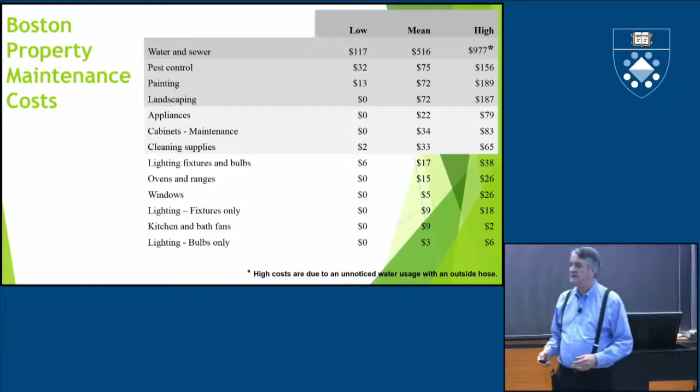Why do we have these wide variances in buildings? And why don't owners look at this? This disturbs me. Well, this isn't just bulbs and cabinets and appliances. In multifamily buildings, there's catastrophic waste. Oh, you're an owner, so you know this. There's catastrophic waste in groups of buildings. And this is a range of energy usage I've seen in buildings.

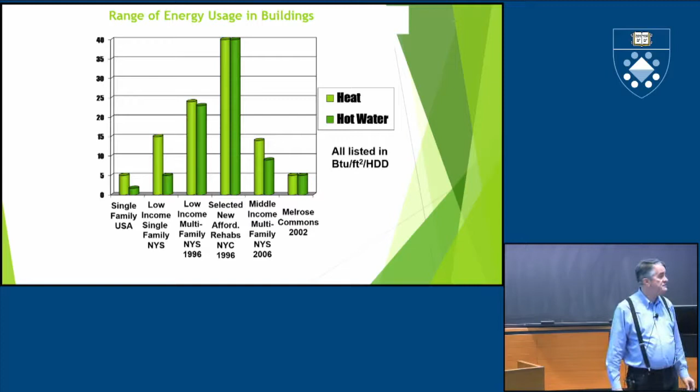But in 2002, I worked with a developer whose family has been in the business for 30 years. And we convinced him to change some things that he did in his building. And he built 70 units of affordable housing in the middle of the South Bronx called Melrose Commons. They performed at 5 BTUs per square foot per heating degree day. The builder said they cost him an average of $1.36 per square foot more.

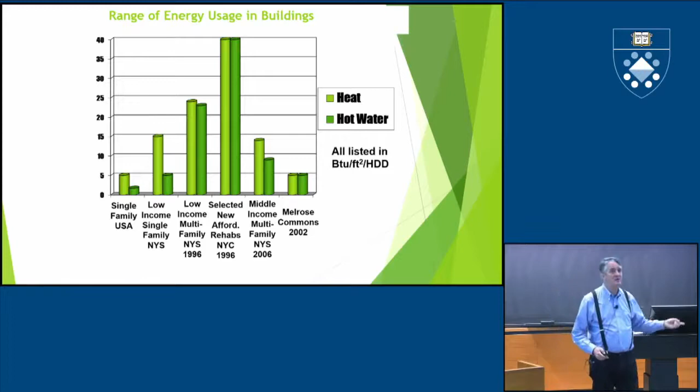This is stuff where logic is really simple. If you look at this chart as BTUs per square foot per heating degree day, and then go back to what the cost of gas was then, this is a difference of between under $1 and over $7 a square foot. This is very common in multifamily buildings, that owners of multifamily buildings don't see how much their buildings cost. As long as the buildings are profitable, they don't understand the cash flow from saving energy.

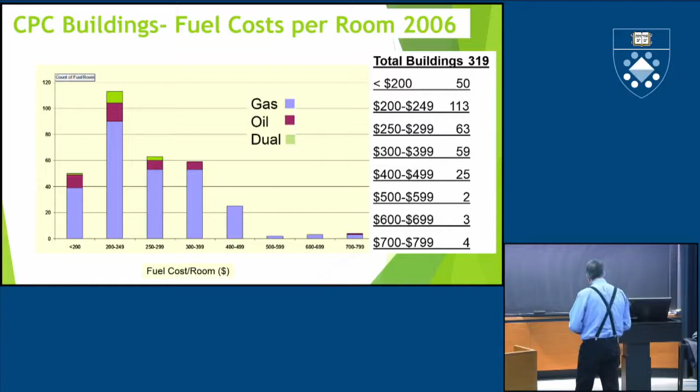I've met with people in the New York City Mayor's office doing a program for cash flow efficiency, energy efficiency for multifamily buildings, and I said, where's water? They said, oh, we're not doing water. I'm like, water's the biggest cost to building owners, not only in New York City, but in Boston, in Hartford. I actually don't know New Haven numbers that well.

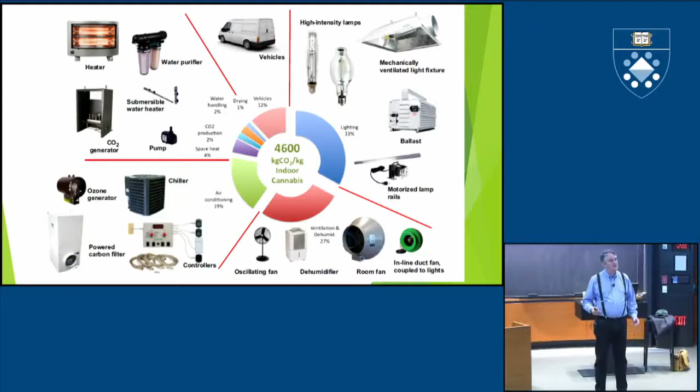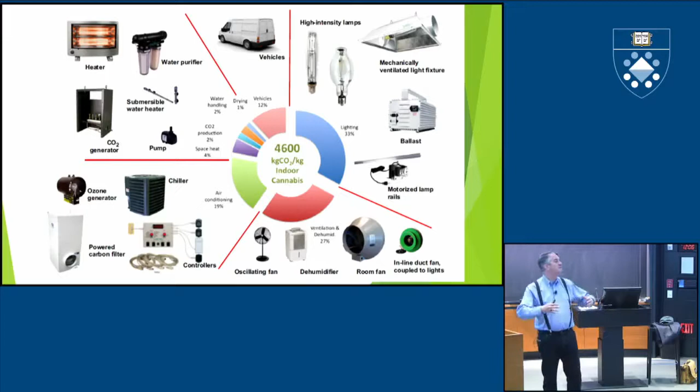Marijuana takes a lot of pumps and air and stuff. I actually talked to a marijuana manufacturer 3 months ago and suggested he change his lighting from fluorescent to LED. And this guy went into this detailed scientific stuff about why LED lights don't work well enough and they have to get a different spectrum for LED. Anyway, that's pot growing, we don't have to talk about that.

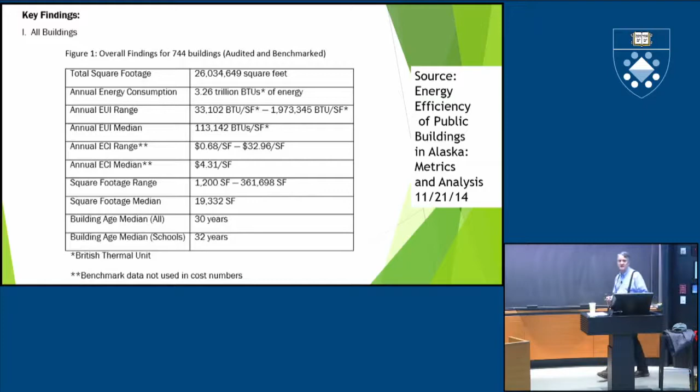Well, if they look at it, they find out that the space heat loss by component for all audited buildings, that big blue chart again, is ventilation and air leakage. The buildings leak. They need to be caulked, and the ventilation needs to be fixed. It's crazy. It's the same thing that's wrong with all of our buildings. Our buildings leak. We don't make them tighter. Our buildings are ventilated poorly or too much, and we don't balance them.

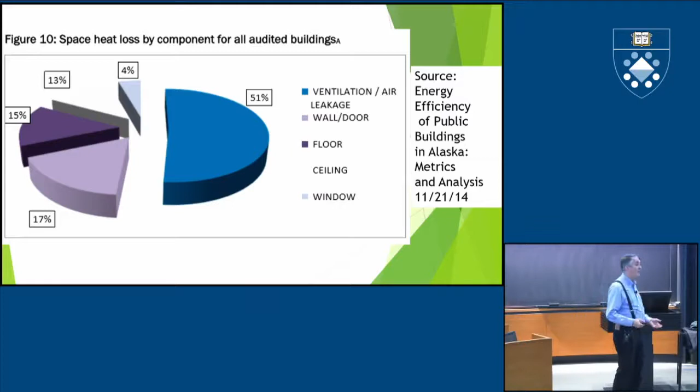I walk into thousands and thousands of buildings in my career, and technical inefficiency is exactly the same in all the buildings. If I push this, it'll go. First off, tighten the buildings. Increase air sealing and fire stopping.

If you say you're going to air seal a building, building owners get scared that their tenants are going to suffocate. But if you tell them you're going to fire stop the building, it's the same thing. And it meets code. And it stops fire from spreading. In areas, every place in buildings.

Good systems. Why do I hire an engineer, nothing against you engineers, why do I hire an engineer to write a specification for a boiler replacement or an air conditioning replacement that the paper is 2 inches thick when I get it? The first inch tells me every single code that has happened since the beginning of time. The bottom half tells me everything that the engineer and architect are not responsible for.

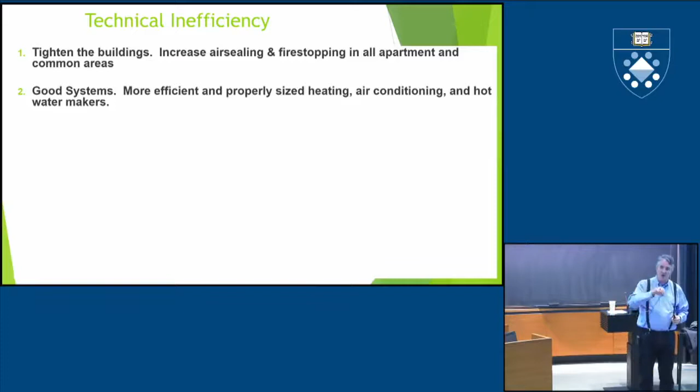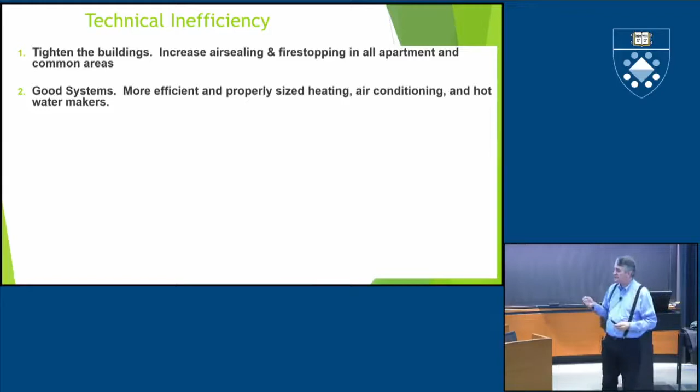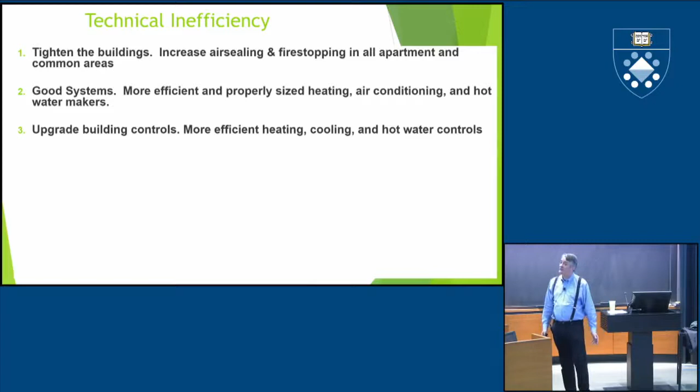And in the center, there's one piece that draws the basement and shows a box and a circle. And it says, put boiler here, put hot water heater here, replace with same. Okay? That's like taking your iPhone and changing it into a dial phone. It's backwards. Don't replace with same. Upgrade the building controls. If you walk by a building and all the windows are open, the building's overheated. So you have to fix that.

Save water. I was very impressed. I went into the bathroom here, and the bathroom sinks here are running at a little under a gallon a minute. That's really good. Most bathroom sinks in most LEED buildings run at 2.5 gallons a minute. That typically makes water splash on the floor and in your face.

Shower heads are 5 gallons a minute. It's like the water's all over the place. Okay, I'm a big guy, and I can't get 5 gallons a minute on me when I'm in the shower no matter what. Okay, we catastrophically waste water. Toilets are the big waster.

Fix the ventilation systems. They're big, they suck a lot of air out of the building. In the bottom floor of an apartment building, they draw 7 cubic feet per minute. On the top, they draw 140. We want to balance them at about 35. There's an easy way to do that.

Brighter spaces. Let's get better light. The guys came in here today to show me this space. There's mostly LED lights in here, but there's halogens where they don't need to be. The lights aren't dimmable. What the heck? This is a performance space. This should be a little more controllable.

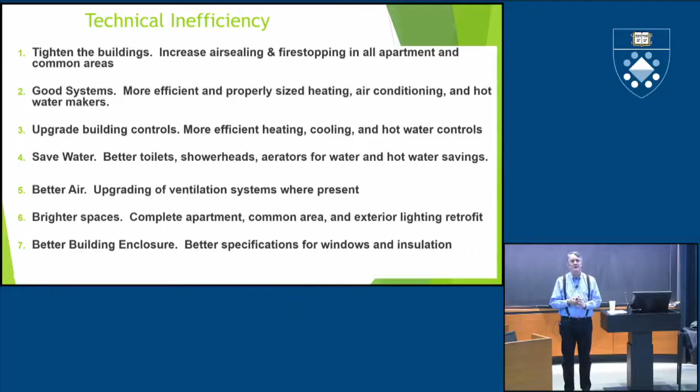And I love that this building has a lot of daylighting. That's very nice. I don't know if the exterior glass is high efficiency, but there's a lot of daylighting here. Better building enclosures. Specify better windows and insulation. You can't say to insulation, place fiberglass in walls. No, you have to have an actual way how to do it.

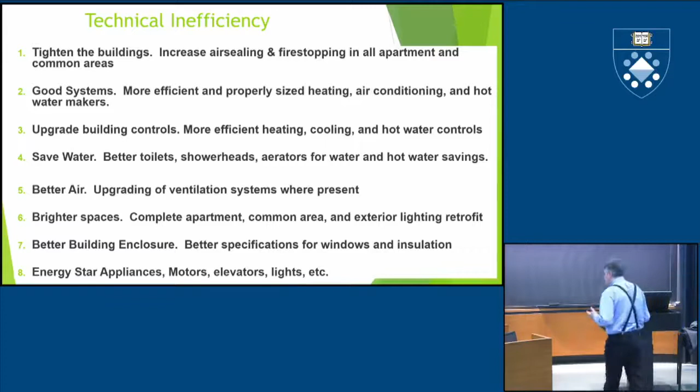And this is the easy thing, Energy Star appliances, motors, elevators, and lights, but there's 2 things that are even more difficult to get done, and this is psychology-related stuff. Owners don't get help from building professionals. They listen to their cousin Vinny before they listen to anyone. And this is a big mistake. They listen to a contractor. Windows will save you 40%. Let me explain something to you. Unless a building doesn't have windows, windows won't save you 40%. I've never seen a job where windows saved more than 5. Okay? So you need help.

Talk to people. And get everybody together in the same room. The super, the manager, everybody else. And then talk to your peers that can help. Start looking at the programs before you do this big retrofit or before you build a new building. Get the team together. Where is the money available? What money can I get to do this?

Okay, now move. So when you talk to building owners and decision makers, if you want to really convince them of something, take them outside their building. Walk them around. Ask them to pretend they don't own or manage it. And they'll suddenly see open windows in their building. And they'll say, those stupid tenants. It's not the stupid tenants, it's the stupid owner. You're overheating the building. And that's the only way they can turn it off. Look around and point stuff out to them.

Thank you for that. And what's that? Thanks. Oh, now the building owner in the crowd is like, hey, I should really do this. And all owners don't speak that way, I'm sorry.

And I hate the expression think outside the box, but I was with an energy service company the other day, and all they wanted to do is the same old crap. And I said, we can do something really easy, and it'll be cheaper. I won't get into the technical stuff, but they were like, wow, that is a lot easier.

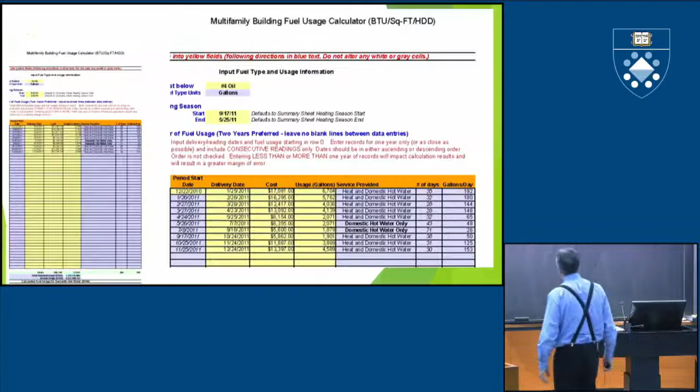So in this very blurry graph that people don't like, we entered the fuel usage in the building. This is gas or oil. We entered the electric usage in the building.

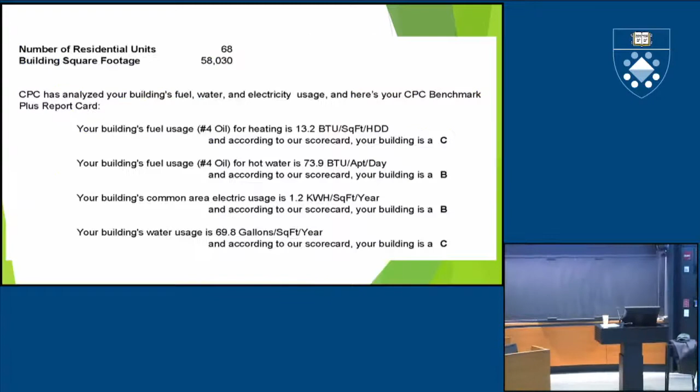We entered the water use in the building, and out popped out of our fancy little spreadsheet: here you are compared to every other building. Your building's fuel usage for heating is a C. Your building's oil usage for hot water is a B. Your building's common area electric use is a B. Your building's water use. We gave owners report cards.

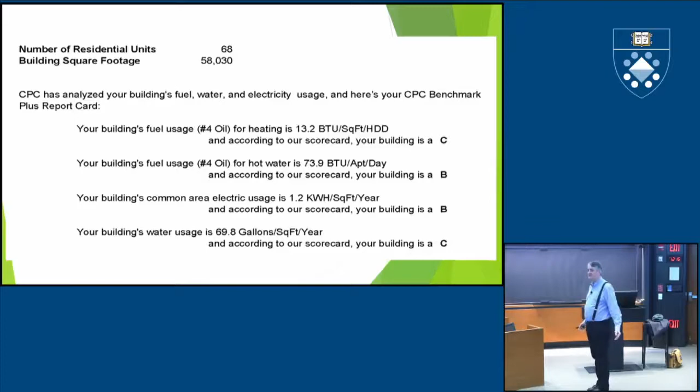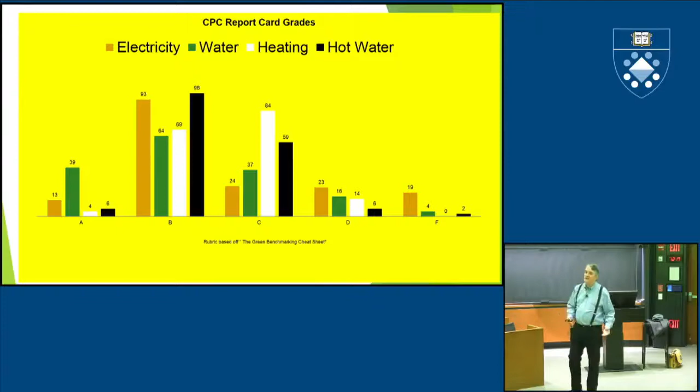And when we looked at all of the report cards of all the buildings and charted them in this yellow chart that makes everything stand out so people can actually see it, you'll see that we have a bell curve. And we can find out the failures. The orangish color is electricity, the greenish color is water, and the white is heating. And we know what to address in a building. And this is what we need to do. We need to look at what the biggest costs are and how to address them.

Buildings that are retrofitted for energy efficiency as part of refinancing can save energy if we target excessive usage and retrofit accordingly. Why don't we do this as part of a retrofit? Why don't we do this as part of refinancing? When we're refinancing the debt on any building, why don't we say, what are the big energy costs and can we reduce them? But the problem is that bankers say energy costs are going to go up 3% per year in every building.

And I took a commercial banking class at NYU, again, one of your sister organizations, and I said to the banker with 40 years experience, is it possible that you could, while refinancing the debt on the building, retrofit the building and the building would use less energy? And to a classroom of 30 people, he said, no. No. It's not humanly possible to save energy in buildings if you're a banker. Frightening. This is frightening.

We had the COO of the bank that I worked in, during Earth Day a couple of years ago, we had a bunch of kids come in to see what a green loan program was like. And the chief operating officer said to these kids, why would a bank be interested in a building they're loaning money to saving energy? And my pal Charles Ottman, who was in the 5th grade, said, because they'll save money in their building and be able to pay your loan back faster. What the heck is wrong with bankers? A 5th grader can figure this out, but bankers can't. When cash flow increases, it's easier for them to pay your loan back.

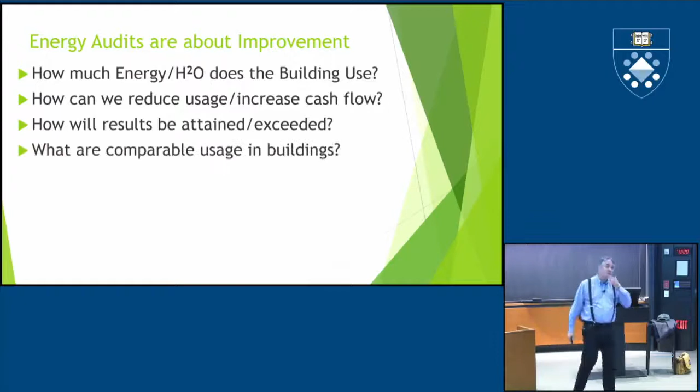But energy audits are about the same thing. They're about improvement, but that's also about risk. How much energy and water does the building use? Can we reduce it and increase cash flow? If we talk about increased cash flow and not environmentalism, people talk to us. How will the results be attained or exceeded? Can we get better efficiency in the building by training the staff? Crazy idea. What are comparable usages in buildings? How do buildings do better? Who owns the buildings and who makes the decisions? Will the building last, or can we increase its life? And is there an environmental problem? We ask the same kind of questions.

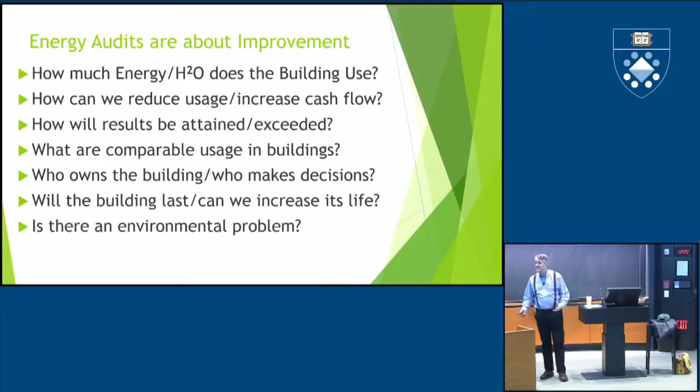If you want to get kicked out of a banker's office, tell them, you just don't understand this. You're doing a retrofit in a building. It's a deep energy retrofit. It's LEED, it's Energy Star, it's Passive House, it's green. I'm an expert.

We did a blower door analysis in the building at CFM 50. If you know what that means, that kind of says how much the building leaks. We're dense packing the walls. These are all things that scare people. Oh, we're air sealing the building in the attic. Yeah, a banker thinks you're going to suffocate the clients.

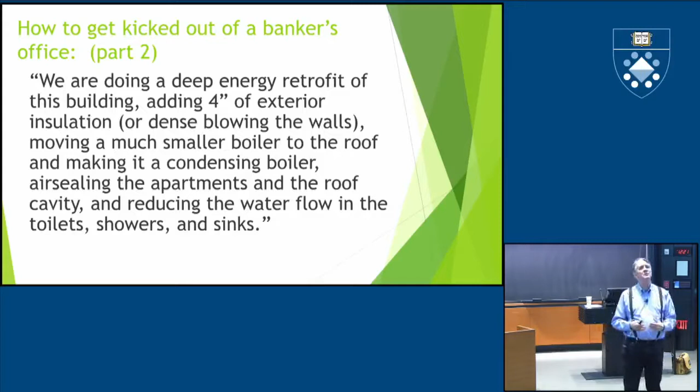They don't want any technical terms like that. The guy that owns buildings over here is shaking his head, yeah, the bank has said that to me. But if you break it down and just say, we're refinancing the debt on the building, we're upgrading the fire stopping throughout the building. Oh, it's not air sealing, it's fire stopping. We're replacing the wall and roof insulation that has surpassed its useful life. Now you're talking to them.

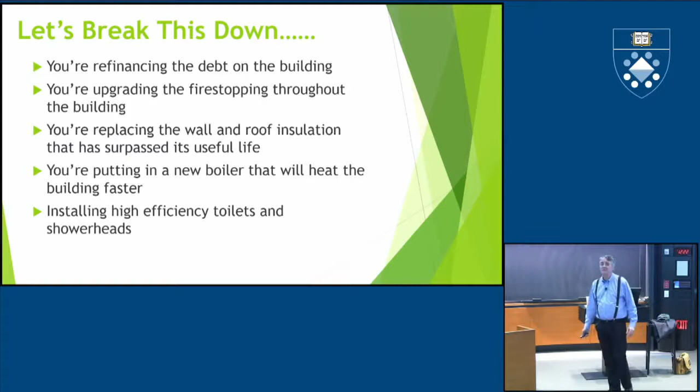We're putting in a new boiler that will heat the building faster. Don't say high performance, don't say condensing, don't say smaller. Just tell them, simple. And we're installing high efficiency toilets and shower heads. High efficiency, that's all. And we have plans, and we have specs, and we have an architect, and we have an engineer, we have a project manager, and we have 3 bids. Bankers love you then, as long as you talk their language to them.

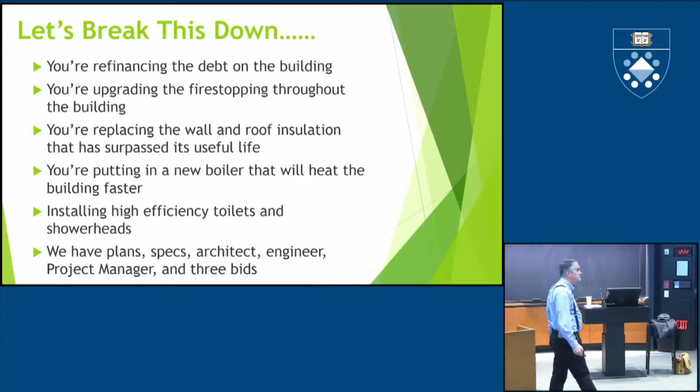Well, I'm going to run through the economics of doing this. So if you have a 20-unit building that's got $1,000 a month rent, that building pulls in $240,000 a year. But the expenses will be about $4,500 per unit. The taxes will be $2,500 a unit. The total expenses are $140,000. That means the net operating income, or NOI, is $100,000 because 240 minus 140 is $100,000. Okay, so there's your net operating income.

But the property mortgage is currently $1.2 million. If you look at the debt coverage ratio, you take the $100,000, you divide it by 1.25, and they're able to borrow $80,000 a year. Divide that by 12, it's about $6,500 monthly payment. That's a 30-year loan at 5%. Cash flow is about $20,000 per year. Okay, these are all up on the web afterwards, but I just want to run through them.

But underwrite the savings into the first mortgage. The expenses are $90,000. Say 35% are for utilities. Project 20% savings. That makes an additional monthly payment of $525. You add that to the 30-year first mortgage of 5%. That's $98,000. It's very simple. It blends things in, and you have better cash flow.

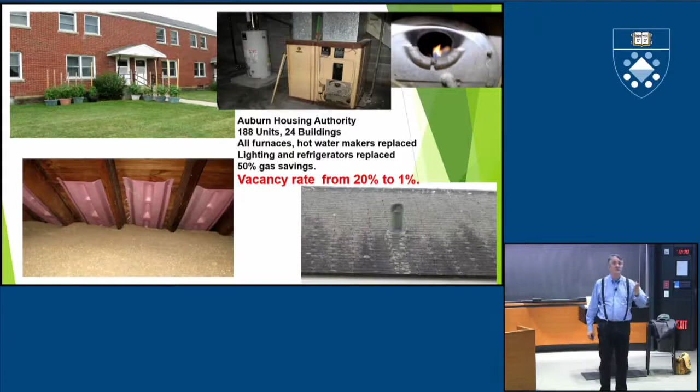This is the Auburn Housing Authority. It's 188 units, it's 24 buildings. Those of you that have studied architecture, you can see from the buildings on the upper left-hand corner, this is called Early Modern Eisenhower Bomb Shelter. It's very, very prominent architecture from the 50s and 60s.

But get back there. We put in new furnaces. We put in new hot water makers. We did lighting and refrigeration. Look at that number underneath there. It says 50% gas savings. The executive director of the Housing Authority wrote a 2-page thank you letter to us. You don't get those too often. Saying, you guys did a really good job.

But the big moneymaker on the building, word around Auburn was, hey, Auburn Heights fixed up their building. Their vacancy rate went from 20% to 1%. Increased their cash flow, and increased their rent. That was a good thing. We made them a lot of money.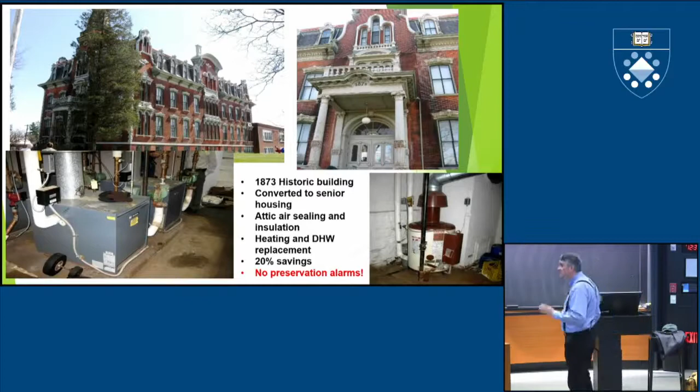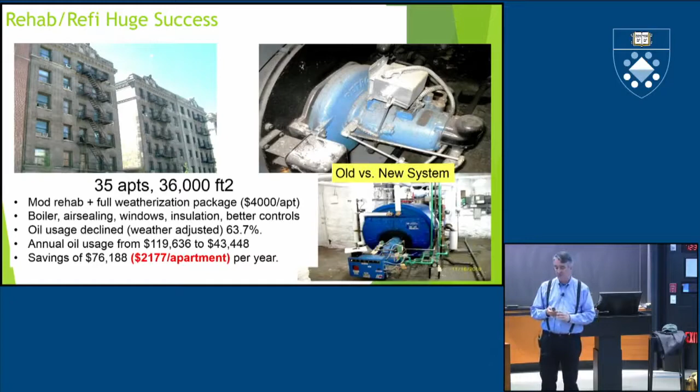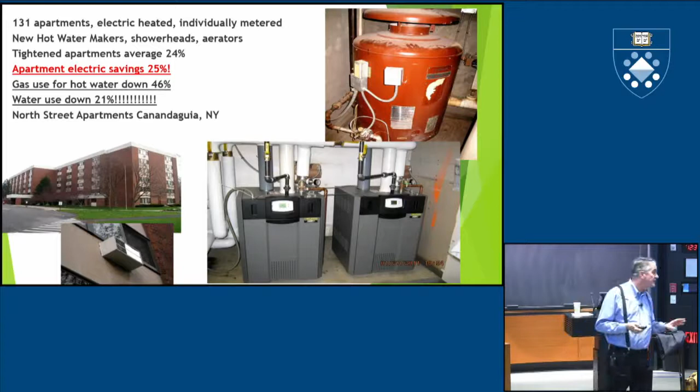That's a good deal. The gas used for hot water, just by changing shower heads and aerators and putting in new hot water heaters, the gas use went down 46%. But shower heads and aerators alone cut the water bill by 21%. These are seniors. They don't use much water. This is big money, okay?

Picture. Last week, I went to a building, and I found this toilet. And the apartment was vacant, and I had to pee. So I closed the door to the bathroom, and I peed. And I washed my hands. Yes, I washed my hands after I pee. And I flushed the toilet.

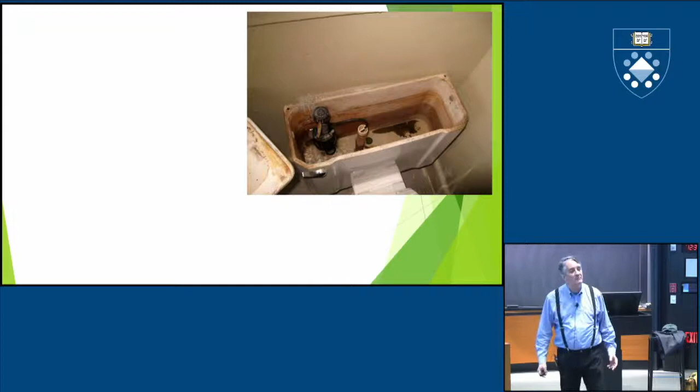And while I was looking at the rest of the apartment, the toilet was running constantly because the flapper valve was broken. And the toilet was running and running and running. And I bent over and fixed the flapper valve and pushed it back down. And then I looked at the toilet. If you pick up the lid to a toilet, you can see the date that it was manufactured. Happy 58th birthday, toilet. What the hell? This is crazy.

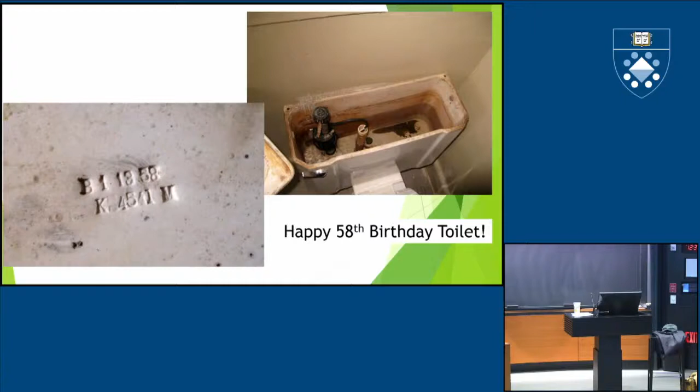This is a building I'm very familiar with. The owner of the building said, the costs in my building for water are terrible. Obviously, there's leaks in the building. And I'm like, Al, it's not the leaks. It's your toilets. Your toilets are crappy. No pun intended. He changed the toilets from the kind of toilets I showed you in the last picture to

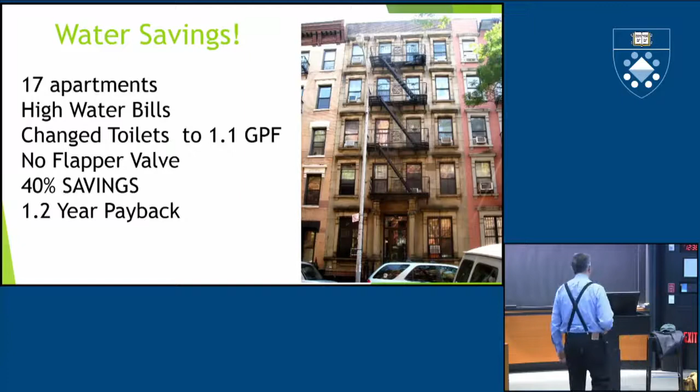the 1.1 gallon per flush that does not have a flapper valve in it. It's called a power flush toilet. It makes the zoom noise when you flush it. His water use went down 40% in 1 month, just from toilets. When he told me beforehand, no, those toilets don't work. My plumber told me so. I'm like, how old's your plumber? He said, 84. It's like, this is the advice that people are getting on energy efficiency. 1.2-year payback on this building.

Okay, now we go back to Peter Cooper Village, Stuyvesant Town versus the Solaire. How many people think the old building is more efficient? Raise your hand. How many people think the new building is more efficient? Raise your hand. How many people are cowards and won't raise their hand? There's about a third of you that won't raise your hand. The old building uses a third less energy than the new building to heat the building. It's partially unfair because the new building has 24-hour ventilation, so that increases the cost a little bit.

But the old building is incredibly well managed. I did the energy audit of that building. It took 6 months. And when first going through it, I didn't think that we could get any. I thought, old building, pig. No, old building, super efficient. And the management company was very, very good at what it did. Also, the building had been painted 500,000 times, which tightens up the interior of the apartments so they don't leak that much. So the apartments are tight and everything's pretty good. The management company got the number.

I want you to look in this room. There's 2 types of lights in this room, and out in the hall there's probably 6 more. In an 11,000 unit building, they have 6 types of fixtures. 6. That reduces maintenance. That increases your ability to buy bulbs in bulk and get a better price. It's not just how good the building is, it's how well the building is managed.